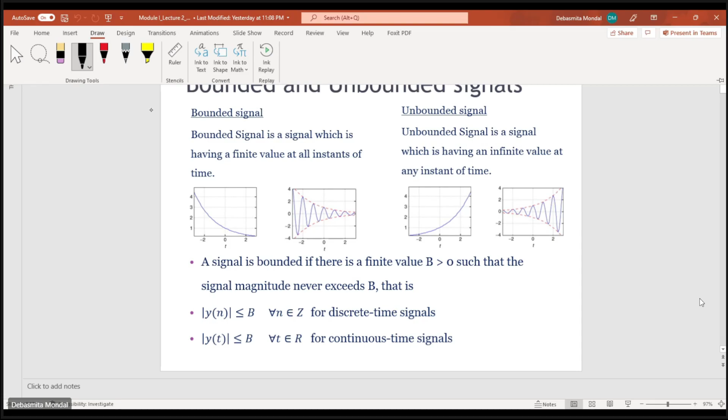So if you take this figure, here you see that this signal is basically decreasing with time. So that means it started off at time t equals to something, at some finite value, and it is slowly gradually decreasing with time. So that means this will be known as a bounded signal.

Similarly, for this one, you see that at whatever time instant, you will get a finite value. At least if you follow this trend, if something else doesn't happen unnaturally, the signal will have a finite value at any time instant.

And if you get a signal which is not bounded, an unbounded signal means that it might have an infinite value at any instant of time. For this signal, you see that if you follow the trend, it is exponentially growing. So that means it might so happen that at some later point, at time t equals to infinity, the value of this signal will reach infinity. So that means this is known as an unbounded signal.

Similarly, here you see the oscillations are gradually increasing with time. So that means at infinite time, you will get an infinite value of the signal. Those kind of signals will have an infinite value, not necessarily at t equals to infinity, it can be at any point. If at any instant of time the value of a signal is not finite, then we say that it is an unbounded signal.

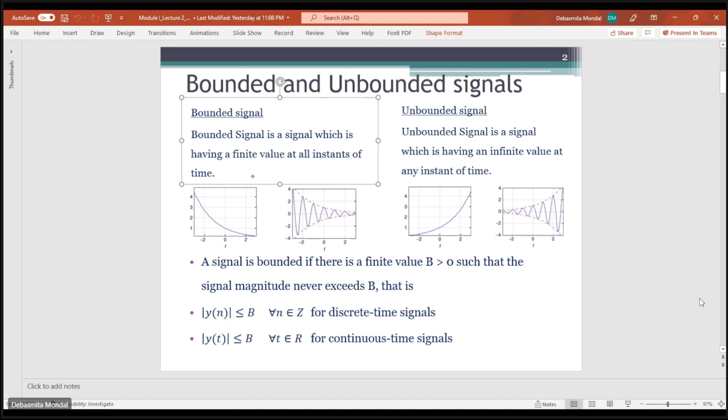Similarly, if you are dealing with discrete time signals, the magnitude of y(n) will always be less than or equal to B for any integral value of n. So if these conditions are satisfied, then you say that the signal is bounded.

Similarly, this concept of stability comes from the bounded input, bounded output scenario. This means if you are provided with a system and you give a bounded input to that system, then in that condition, if the output generated by the system is also bounded, it is said that the system is stable.

So you will say that a system is stable if for every bounded input applied to the system, the output generated is also a bounded signal. However, the system will be unstable if you are providing any bounded input, but the output you get for that corresponding bounded input is unbounded - then we say that the system is unstable.

And if your output is also a bounded signal, that means your system is stable. But in the second case, you're applying the same bounded input to a different system, and because of that the output you're getting is actually increasing and going on to infinity. So that means the output is an unbounded signal. In this kind of scenario, you say it is known as an unstable system.

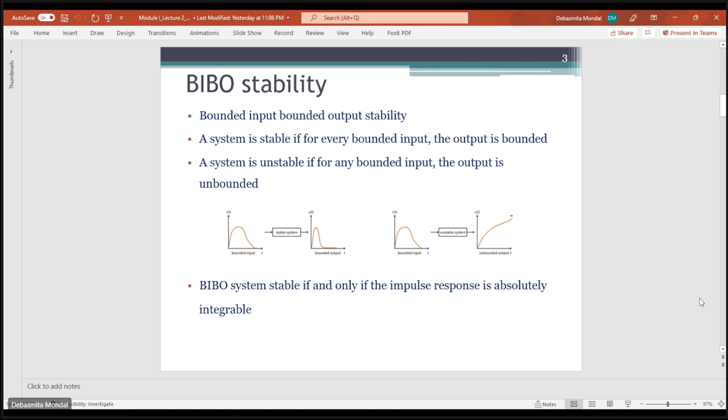Now if the absolute value of this integral is not... this is the absolute value of the overall integral. If you take the absolute value of each of these terms, the absolute value of an integral is not greater than the integral of the absolute value of the integrand. This is a property of convolution and a property of dealing with magnitudes. So the magnitude of c(t) will always be less than or equal to the integration of the magnitude of these two terms being integrated.

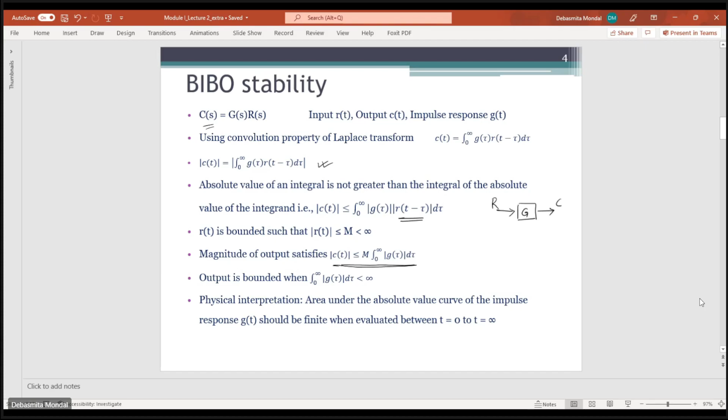Okay, clear? Yes, ma'am.

So the next topic that we will brush up upon is that of rotational systems. We had already discussed earlier about translational mechanical systems, where a mechanical system consists of a combination of mass, spring, and some kind of friction or damping element. That was a translational system. The corresponding rotational system can also be drawn.

To the spring mass damper system. In case of a rotational system, we will be applying some torque T, and after application of this torque, it will tend to rotate the disc.

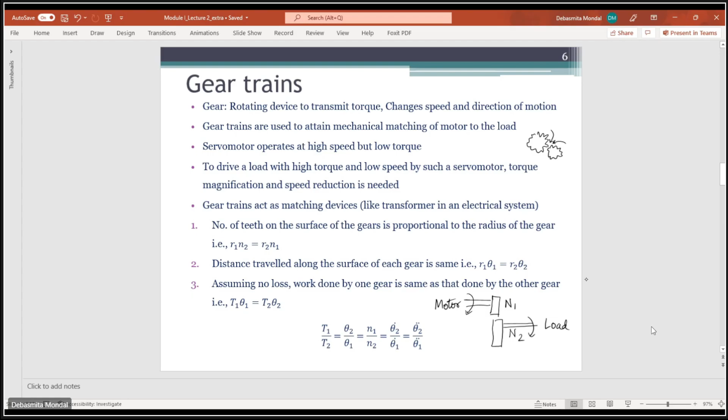So from these three equations, you can write that if you take a ratio of torque 1 in this gear to torque 2 in the other gear, that will be equal to θ2 by θ1, or if you want to represent it in terms of velocity or acceleration, that will be equal to θ2 dot by θ1 dot.

So let's say you have a gear train kind of mechanism, with a motor on the primary side and a load on the secondary side. Here we are assuming that the shaft has infinite compliance and the shaft stiffness is 0, meaning this K theta term is 0 for this kind of operation.

If you consider that, then for shaft 1, you write the differential equation while modeling it. That differential equation is given by, if Tm is the torque developed by the motor, then J1 theta1 double dot plus F1 theta1 dot plus T1, where T1 is the load torque applied on gear 1 because of the rest of the gear train — whatever effect the second gear train has on the first gear is known as T1.

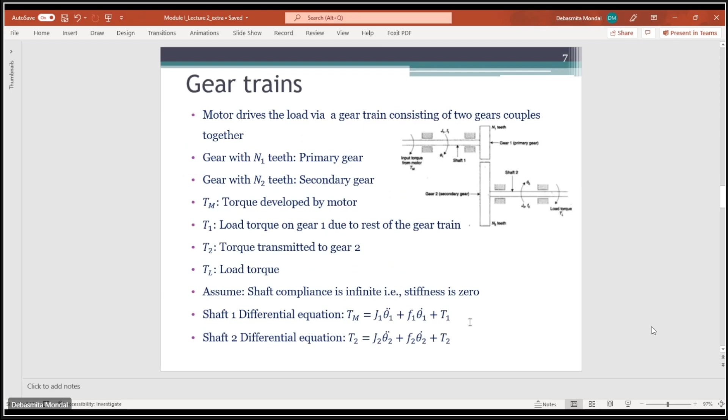From shaft 2's point of view, if you want to do the same calculation, you have to remove theta1, substitute it, and find the expression in terms of the load torque and theta2. From there you can find the moment of inertia, viscous friction, and load torque, everything with respect to shaft 2.

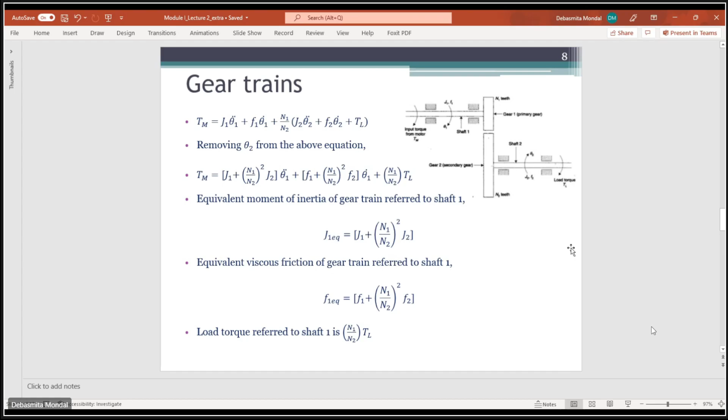This is how a rotational system is usually connected using a gear train kind of mechanism. As we had already talked earlier for force-voltage analogy, torque is equivalent to force, or in the force-voltage analogy, torque will be equivalent to voltage source, inertia equivalent to inductance, and so on.

Similarly, once you have found this equation, for the force-current analogy you can also find which terms or elements in the mechanical rotational system are equivalent to what electrical parameters.

So the last topic before we move on to practicing some problems is the analysis of mechanical systems. First, when we have an electrical system, it becomes easy to analyze because we can apply KCL and KVL — given an electrical system, you find the nodes and loops and apply KCL and KVL to find the final differential equation model of the system.

But in case of a mechanical system, there are two ways of doing this analysis. The first one is that you draw the free body diagram corresponding to each mass or inertia element that you have in the mechanical system.

In the free body diagram, what you will have is that for each mass, you will see all the forces that are being acted upon that mass and the direction of that force. Once you have come up with the direction and magnitude of the forces applicable on each mass, or inertia in case of a rotational system, you apply the second law of motion and find out the differential equation which is governing the whole system.

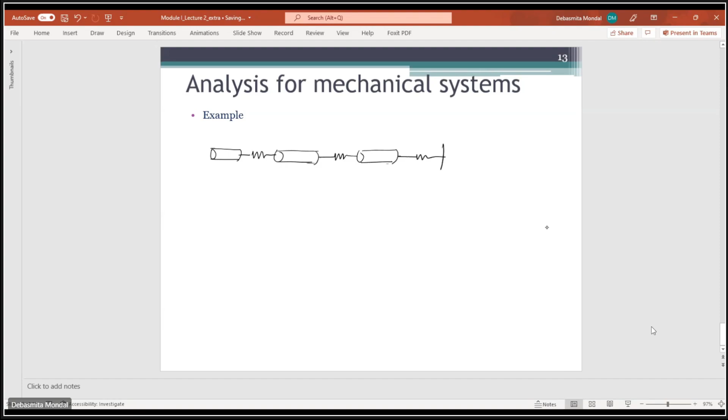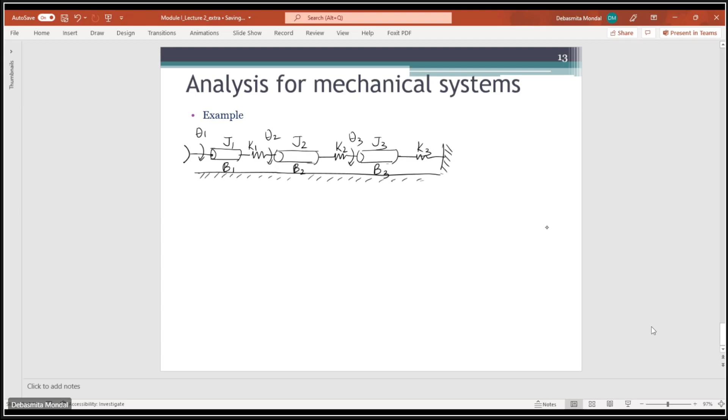Let's say you have a rotational mechanical system. You have J1 here, and this is your reference point. There is viscous friction here also. This is J2, this is J3, with the frictional constants given here. This is moving by an angle of θ1, θ2, θ3, and these are springs K1, K2, K3, and the applied torque is T.

Now can you draw the free body diagram of this system, or the nodal analysis for this system? If you want to do that nodal analysis, how would you first proceed? So how many inertia elements are there?

Three inertia elements. Okay, so for nodal analysis, what you need to do first is identify how many displacements are there. So how many displacements? Three displacements and one reference angle.

Let's say this is θ1, θ2, and you have another displacement θ3 over here. And you have another reference displacement, so let's say that reference node is here. Let me draw it like this.

Now what you will do is connect the inertia elements, irrespective of the position of J1, between the corresponding displacement node and the reference node. So what is the inertia element present between θ1?

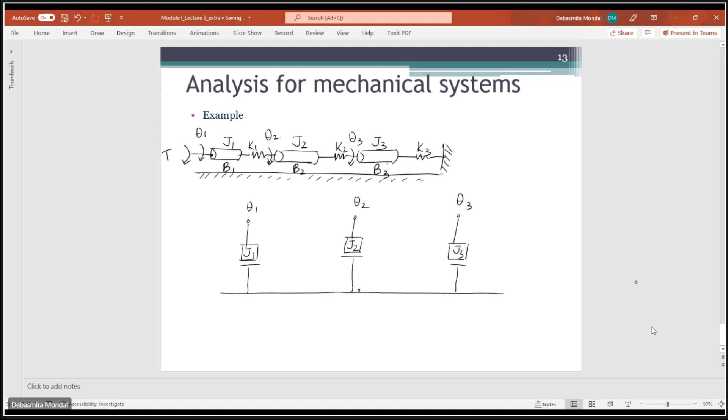The θ1 and θ2. B1 between θ1 and θ2? Yes, ma'am. No, B1, no ma'am, it should be between J1 and θ1. Between J1? So it won't be between J1. The J1 is basically the property of this inertia element, and B1 is the friction happening at this surface, this overall element. So B1 is another property of that.

So that means it will be between this node θ1 and what is this bottom node? What is this node? Ma'am, the ground one, the bottom one. The reference node, right? So let's say you connect it, this is your B1, right?

Similarly, tell me the positions for B2 and B3. Yes, ma'am, it will be between θ2 and reference, and θ3 and reference. Yes, so you will have B2 over here and B3 over here. Now what we are left with is connecting K1, K2 and K3. So what will be the positions of K1, K2 and K3?

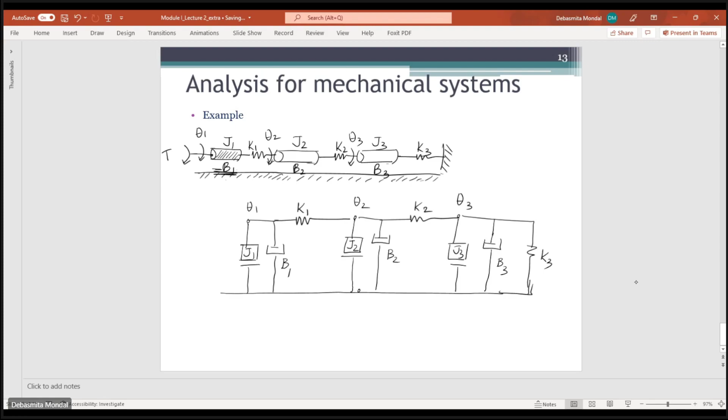Where will the torque be connected? Between theta1 and reference. So you will represent that, let's say this is a torque T. So this is the nodal analysis of the system, the nodal diagram for this mechanical system.

So now for doing the analysis, you have 3 nodes. One node here, and the third node here. In each node you can apply... let's say this T is going in the upward direction. You can take it in the downward direction also, but just take one reference direction for this input torque. So you can write the nodal equations corresponding to these terms at the 3 nodes.

So let's say first of all at node theta1, what will be the equation? There are 4 elements connected to node theta1, right? So you have to write the corresponding expressions for contributions for each of these elements, and then simply by nodal analysis bring everything together. In case of KCL, we had seen that all input currents flowing into a node will equal the summation of all currents flowing outside the node. Similarly, all signals going into the node will equal the summation of all signals going out of the node. So if you apply that principle, what will be the equation at node theta1?

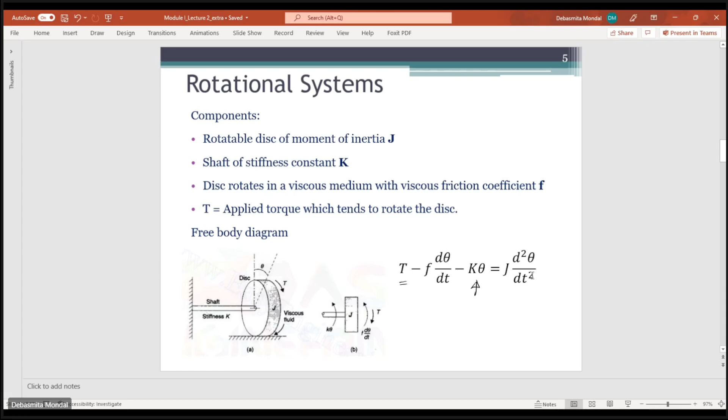So similarly here, the contribution — the input was this, and you have two opposing forces, one due to B1, another due to K1. So that opposing force will come as minus B1 into theta1 dot, and minus for this K1 — what will be the opposing force?

K1 into theta 1? Will it be theta 1, or because K is connected between theta 1 and theta 2, will it be the difference of thetas? So it will be theta 1 minus theta 2.

You have to see, this is a similar kind of analysis as if all these elements were replaced by resistances. If you are doing nodal analysis, applying KCL, for this K1 it will obviously be the current flowing as theta 1 minus theta 2 by K1. If it were an electrical system, it would be theta 1 minus theta 2 by R1.

Similarly in this case, you have to consider the values and between what nodes. Since J1 and B1 are connected with the reference node, that reference node is 0, so it will be theta 1 minus 0, which is equivalent to theta 1. But K1 is not connected between theta 1 and the reference, it is connected between theta 1 and theta 2. So that's why you take K1 into theta 1 minus theta 2. This is going in and all these are going out, so this overall will be equal to 0.

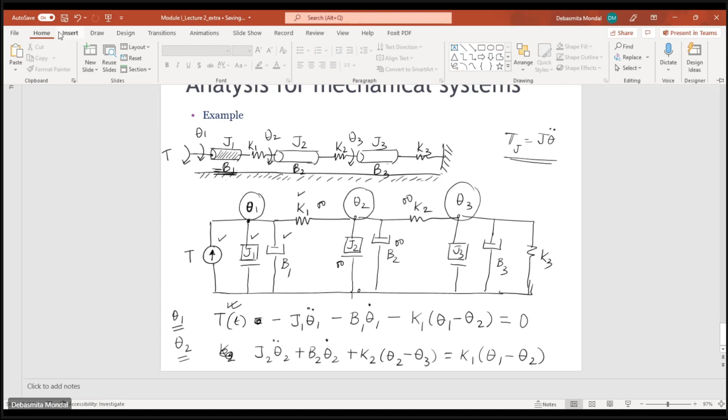Similarly, you can write the equation at node 2. Let me just quickly write it.

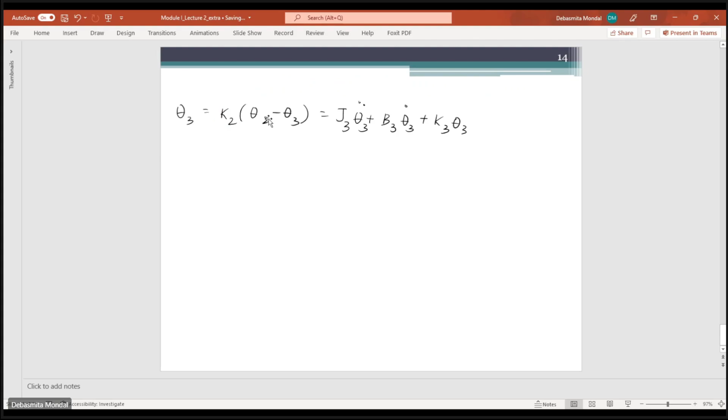Here you have K3, B3, J3 and K2. For K3, and you see that all these three are connected between theta 3 and the reference, and only K2 is connected between theta 2 and theta 3. So you can write this equation at this node.

So this is the mathematical relation, or the differential equation model, of this mechanical system. Now if you want to draw the corresponding force-current or force-voltage analogy: since there are three displacement nodes, there will be three loops in the force-voltage analogy.

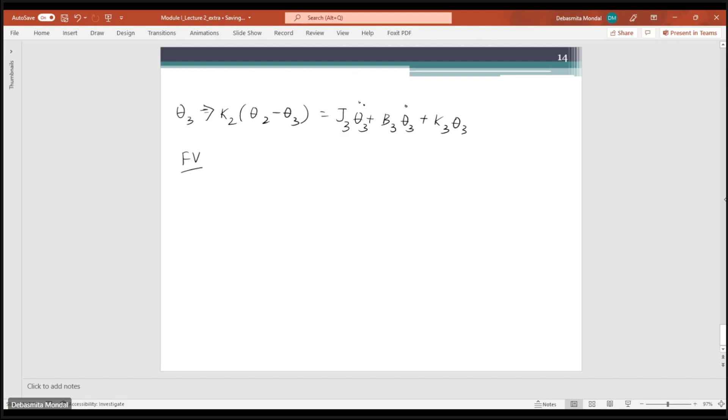If you remember, torque is represented by a voltage source, so you will have a voltage source, let's say e(t), over here. Going back to this figure, inertia is equivalent to an inductance, viscous friction is equivalent to resistance, and spring stiffness is equivalent to 1 by C. So you can simply represent J1 like that.

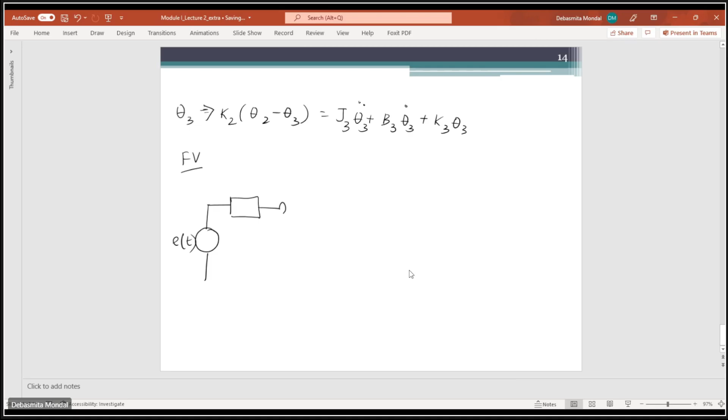Okay, so if it is a common element, that means it will be represented somewhere over here. Similarly, if you want to draw the rest of the circuit, for this second loop you will draw this, you will have another resistance, and then you will have a C over here.

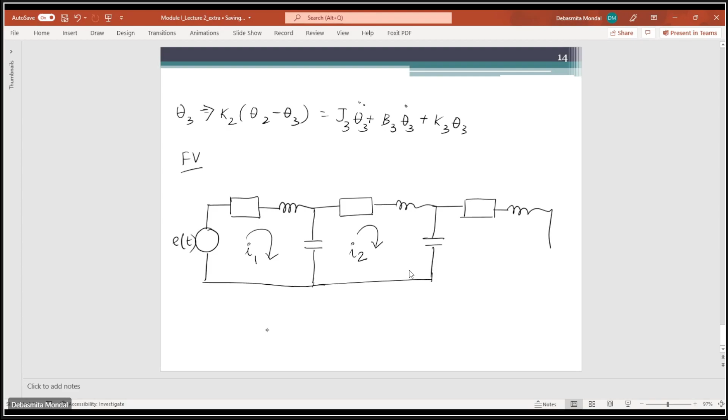So this is your first loop, which is I1 corresponding to theta 1 in the mechanical system. In the second loop, it will be I2 corresponding to theta 2 of your mechanical system. And the third loop will look something like this: R1, L1, 1 by C1, R2, L2, 1 by C2, R3, L3, 1 by C3.

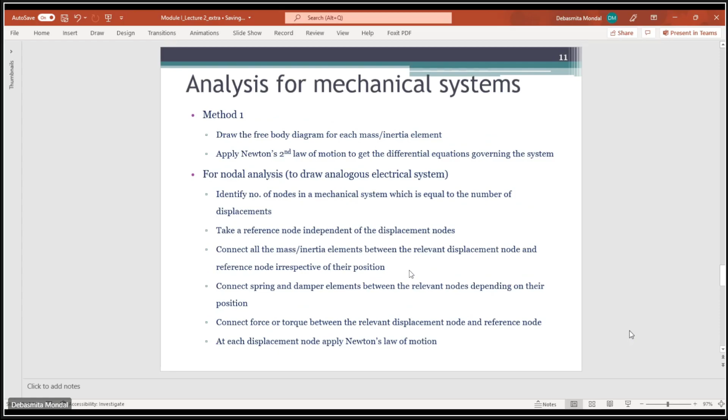In case of a force current analogy, the only thing you need to do is that the torque will be represented by some current source. Here you will just replace all these elements with the corresponding ones, so in this same configuration you will have some resistance, inductance, and this K1 is, in case of force current analogy, K1 will be equal to the inverse of inductor. So you will not have any capacitance over here. Inductor will be connected to the next one.

Okay, so this will be the electrical circuit when you are dealing with it. This will be some voltage V1, this will be another voltage V2, and this is another node voltage V3. So this is how you convert a mechanical system into a corresponding, equivalent, or analogous electrical system.

So is it clear? Did it make sense? 10 minutes.

Okay, so now let us try to solve one question for that sensitivity analysis for you. One doubt in the previous slide: actually the R1 and L1 according to that was related to ground, the reference point.

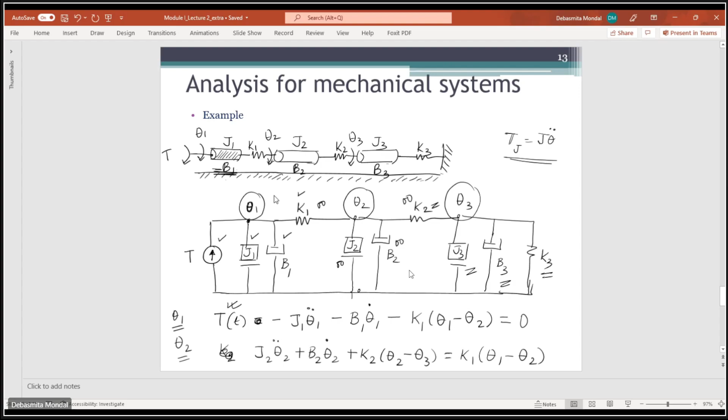And the capacitor was the connection between theta 1 and theta 2. So the capacitor should be connected like in series with theta 1 and theta 2, and the R and L that should be connected to the ground.

You are talking about the force voltage or force current analogy? Force voltage. So in case of a force voltage analogy, we are converting this whole thing. So here you see that it is connected in a branch form, right? So everything is connected between theta 1, one displacement node, and another reference node.

When you are drawing the force voltage analogy, each node will be converted into a loop. In the electrical system, if you are using force voltage analogy, this whole thing will be converted to one loop. So if you have one loop, this whole part is now converted to one loop, which is given by this.

So this R1 and L1, these two are corresponding to J1 and B1, which were connected between theta 1 and the reference. So you have it in series. So these three elements will be in series, and this one will also be in series, but this will be shared by the next part of the circuit as well. So it will come as something common as here. Got my point? Yes ma'am.

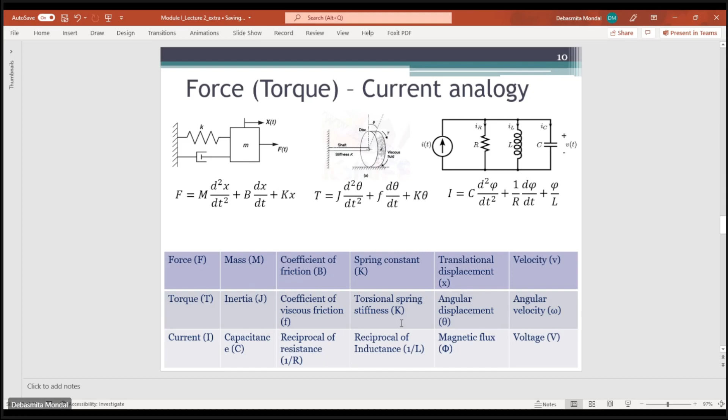So in case of a force current analogy, torque will be equal to current, inertia will be equal to capacitance, this will be equal to 1 by R, and the stiffness of spring will be 1 by L. So for the corresponding B you will have 1 by R, here you will have 1 by L, and this one will be C. This is R1, C1, L1, and this L1 is here.

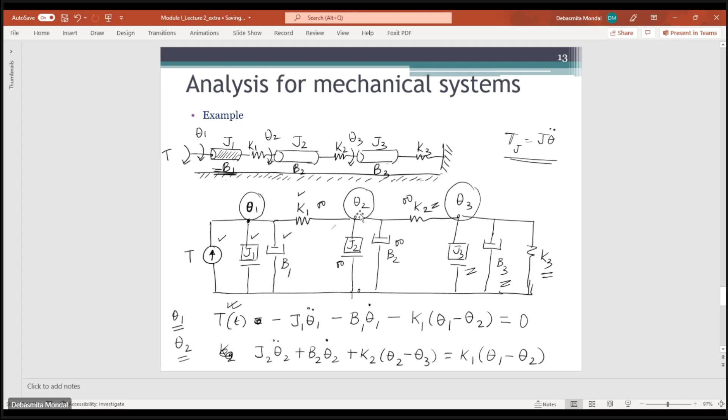You see that this K1, which is corresponding to 1 by L1, that is connected between two displacement nodes. So here also it will be connected between two voltage nodes in the electrical system.

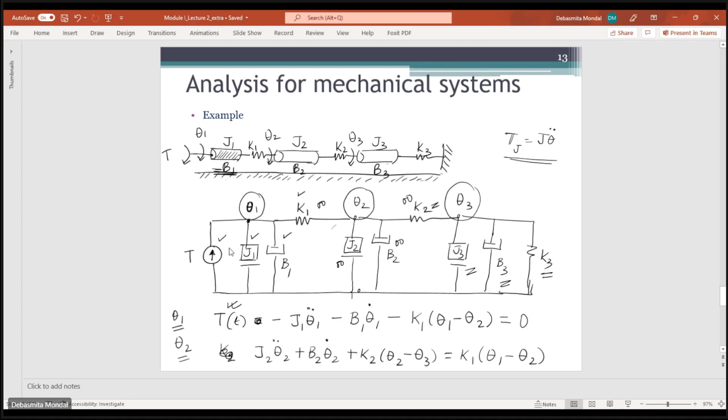So the main difference between force current and force voltage analogy is that in case of force current analogy, you can simply replace whatever is the nodal analysis or nodal diagram with the analogous current electrical elements. But if you are using force voltage analogy, then each branch or each node will be converted into a loop. That means whatever was there in parallel in the mechanical system will be reflected as a series combination in the force voltage analogy. That's why we are having this.

Okay, yes ma'am. So now let's quickly do a sensitivity analysis.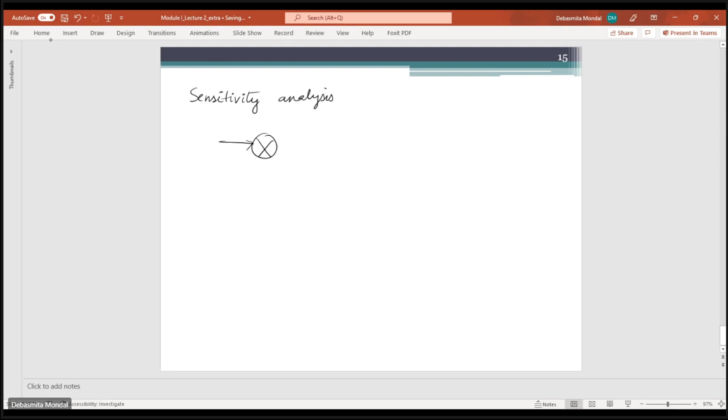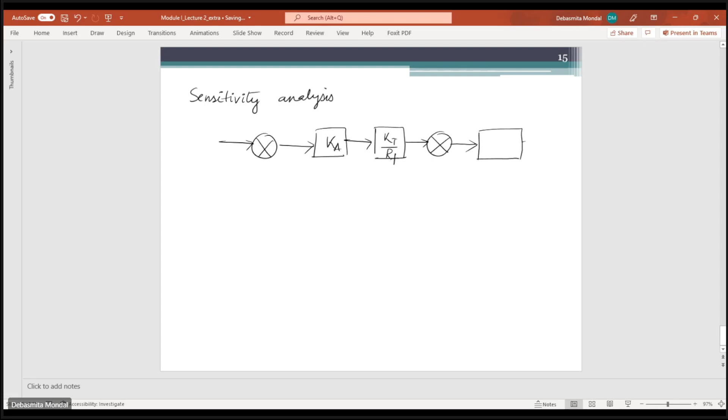So let's say you have been given a problem. I had already shared a scanned copy of the problems from the book by Nagrath Gopal, so you can go through that. In that PDF there are questions on mechanical systems, thermal systems, similar to what we just solved. I think those pages were already available in the PDF version of the book on the internet, that's why I didn't scan them. But for sensitivity analysis, only one or two pages were there, not all of them, so I scanned those pages and uploaded them for your reference. Okay ma'am, I'll refer to the book. So you all have the PDF copy of the book, right? Otherwise I can upload that PDF as well.

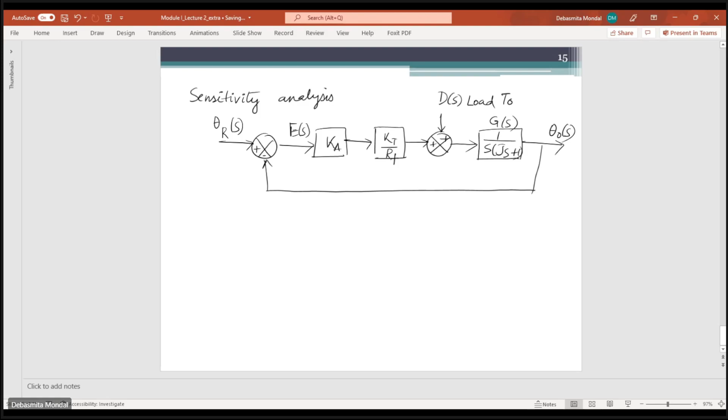So let us say you have been given a system like this. This is a block diagram of a system, and this is your output, theta 0. Theta r is your reference. ES is the difference between the output and the input, and DS is basically a disturbance, or you can say this is a load torque. Now what you have to find out is the value of TDS.

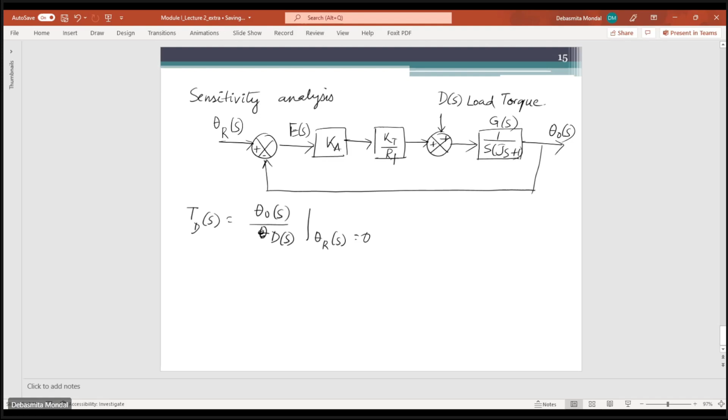So TDS is given by theta 0 S by DS, considering theta rS equals to 0. So first you have to find the value of TDS, and then you have to find the sensitivity of TD with respect to, let's say, Ka. Let us say you want to find it only with respect to Ka. So can you find out what will be the value of TD of S? Yes ma'am.

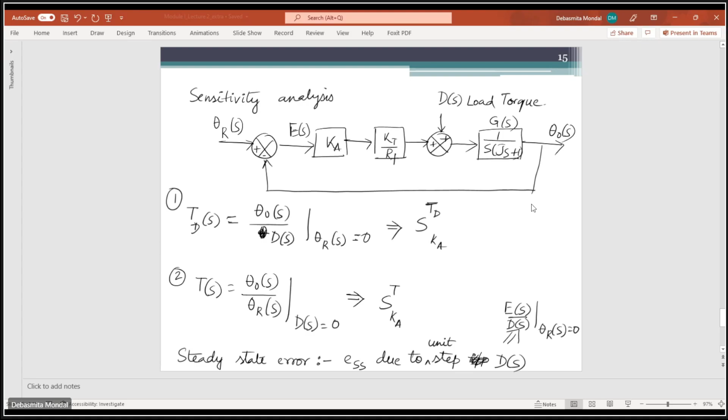Ma'am, 1 by s into js plus 1 is the forward path transfer function, and the feedback path will have 1 because we have nothing here. Why nothing? Because here theta r equals 0, so that means this input now equals 0. This means the comparator basically has only theta 0 directly coming in. So ES will be, previously ES was equal to theta r minus theta 0.

Now if you consider theta r equals 0, ES will be nothing but minus theta 0. So now DS is the input, since we are finding TDS equals theta 0 by DS, output is theta 0 and input is DS, and this is the forward path. So the rest, if you redraw this circuit, DS is your input here, the forward path is GS, that 1 by that thing, and your output is theta 0 S.

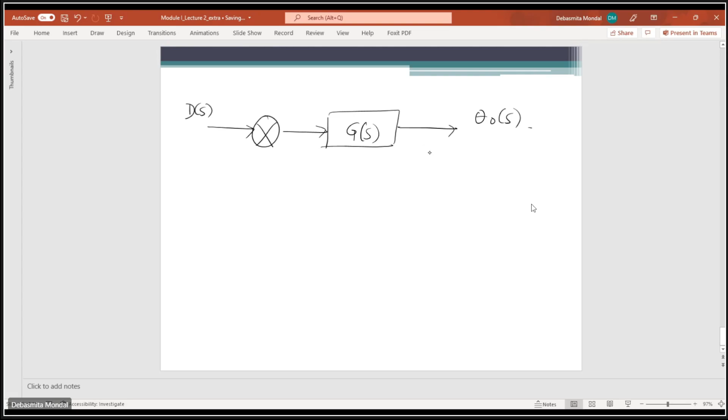Between theta 0 S, this is getting connected: you have Ka over here, then Kt by Rf over here, and this is coming here in the positive direction, correct? So theta 0 is now coming through via Ka and Kt by Rf, and it is going into this error comparator. So this would be your overall block diagram if you consider only DS as your input and remove the value of theta r. Am I right? Yes, okay.

So from here you can find what is the value of theta 0 S by DS. Yes ma'am, it will be Ka into Kt by Rf... theta 0 by DS. So this is like a closed loop system, yes? Yes ma'am, it will be G of S by 1 plus Ka Kt by Rf into G of S.

So will it be a plus sign or a negative sign? Here you see both the signs are plus. This is not a negative feedback, this is a positive feedback. You have to always check what is the sign in which it is going in.

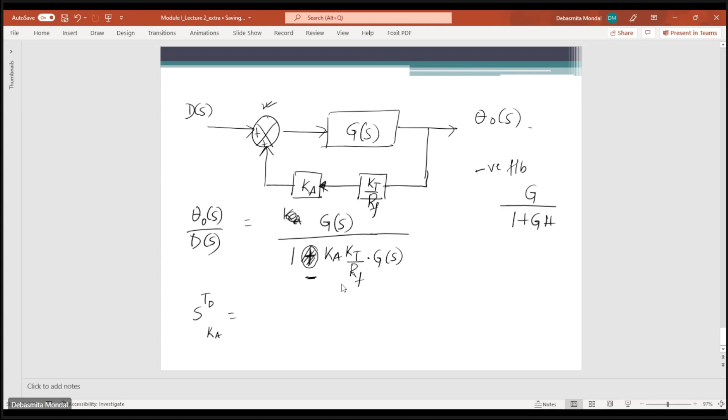So from here I think you can just take the derivative with respect to Ka, and then you will find what is the value of. So what will be the expression for STD, sensitivity of TD with respect to Ka?

Ma'am, here should we see variation in TD or variation in KA? It will be with respect to KA, you have to find the variation of TD. So this is TD with respect to KA.

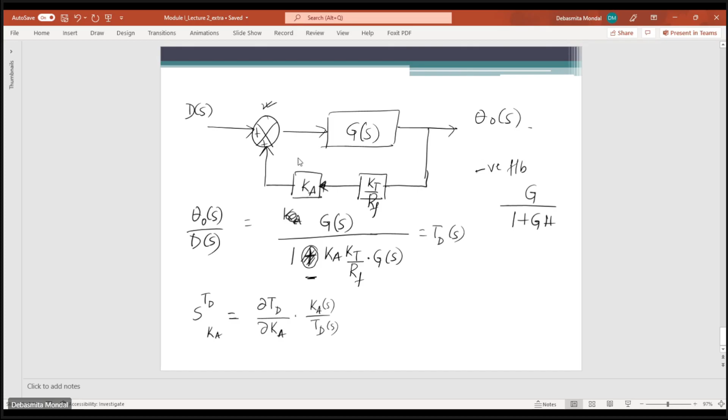Ma'am, in rough work we use a block diagram method for finding out the transfer functions, like for finding the gains, if Ka and Kt by Rf is there, can we write it as Ka and Kt by Rf directly combined? Yes, you can, sort of combining two blocks and representing it as one single block. Yes, definitely you can do that, that is one of the correct ways of doing it. Not necessarily, here I represented it in two different blocks because in the actual diagram it was given as two separate blocks. But two separate blocks can always be combined, if they are not loading each other, they can always be combined and represented as a single block. Like that you can do.